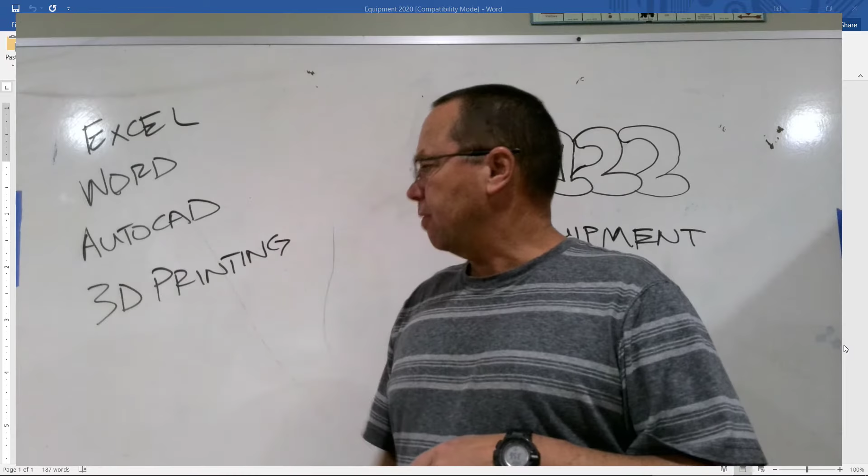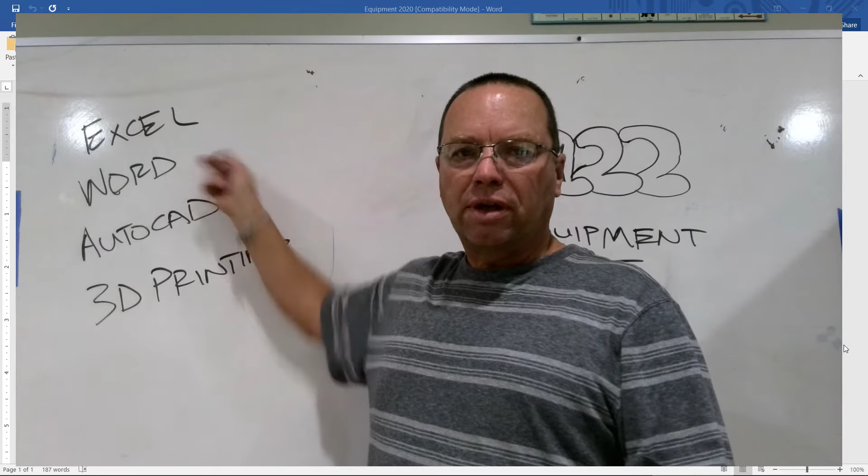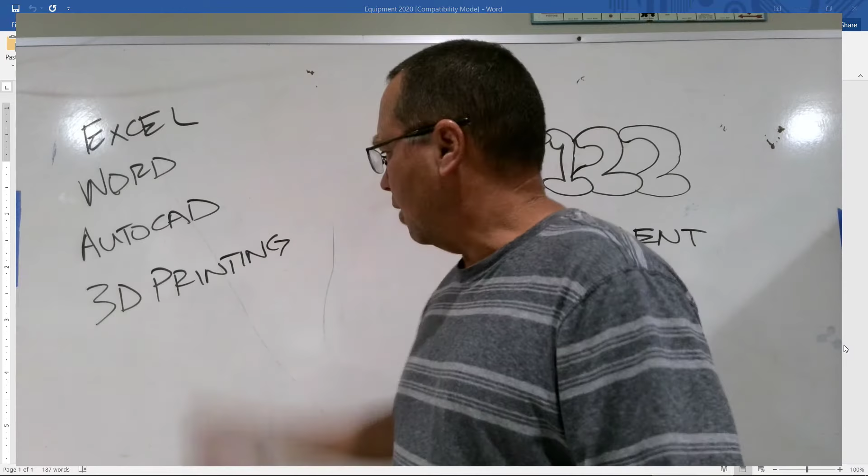I'm going to go through the list real quick, and I have a lot of it here to show you the physical stuff. In addition to the physical stuff, you're going to need access to Excel, Word, AutoCAD, and some 3D printing. Don't buy AutoCAD, I have a free license, we'll download it when we need it. And don't buy the Microsoft Suite either, the college has free versions, I think it's Office 365, so don't buy anything. But if you can start working on downloading it, that would be good. For 3D printing, we have a 3D printer, and we'll talk about that when we get there. But this is engineering problem solving, so we're going to use a lot of different things to solve problems. That's the fun part of the class.

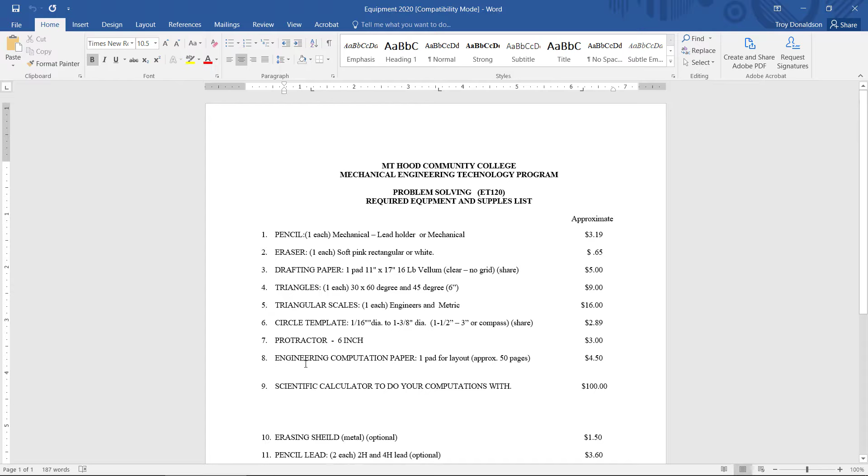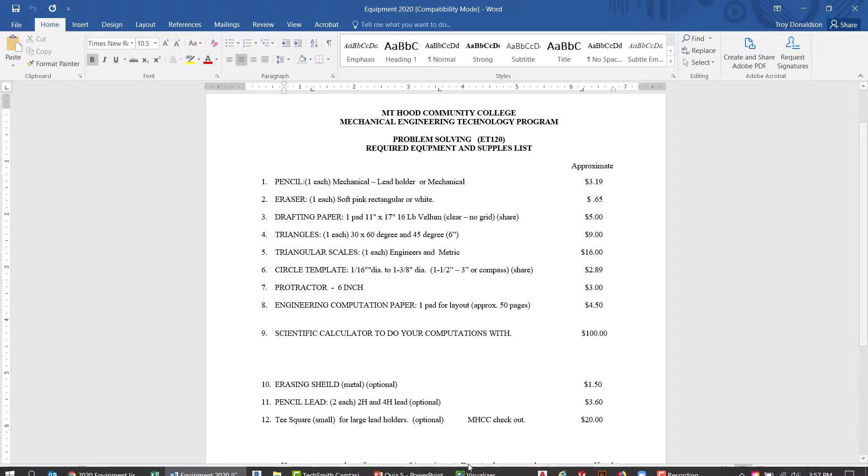All right, let me get to the equipment list. Here is the list, it's on Blackboard. You can look through it, but just words on a piece of paper doesn't always tell you what you need, so I want to go through it. I think I have everything in front of me that is on this list, hopefully, so we'll see. I'm going to take this camera and spin it around and make it look at the ground.

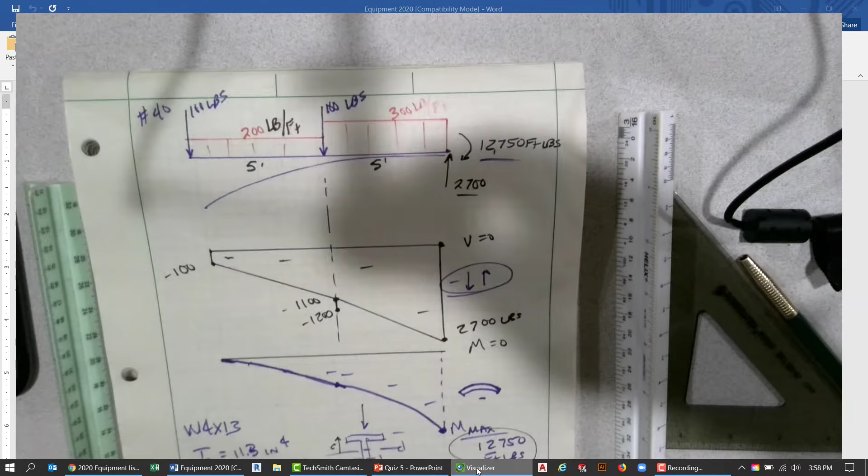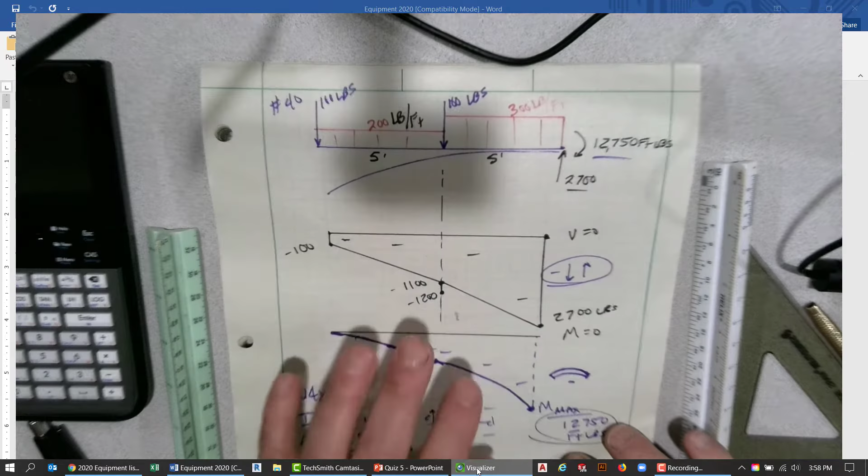Hopefully not upside down. We'll start with the engineering comp paper, that's the green paper you see here. You need to get some. Get a whole pad because you'll use it in a lot of classes. It's gridded, we work on the non-gridded side but the grid comes through, so you can actually draw some decent sketches and diagrams. Here you can see I've been working on some stuff on my engineering comp paper, and this is what you'll be doing too. So get the green paper and use it, try to stay within the borders, and work on the side that does not have the grid, not the side with the grid, like I've done here.

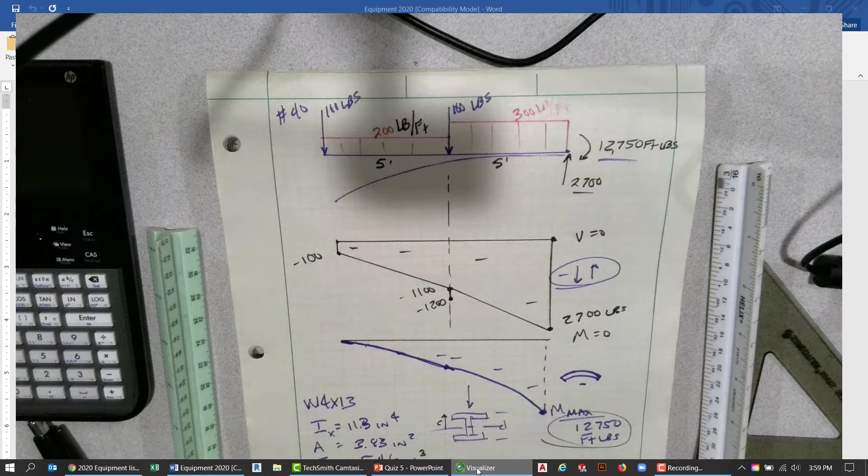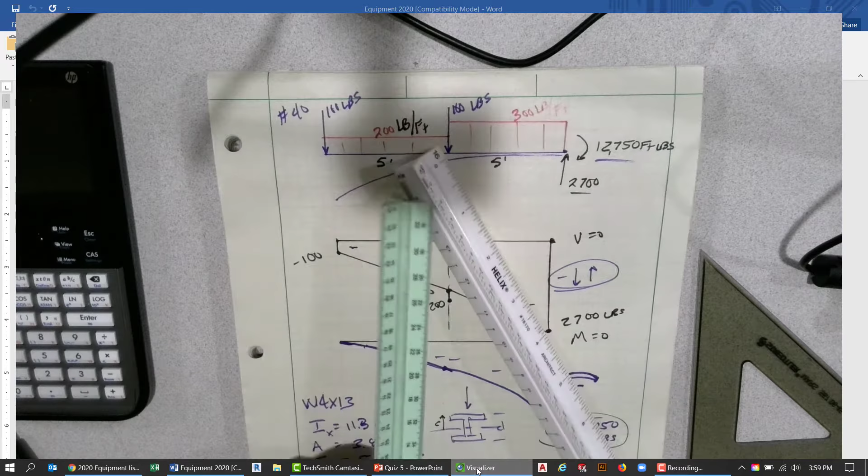Most of this you can get at Office Max and Office Depot. For scales, you're going to need two scales, called triangle scales because they look like triangles. On each side of the scale is a different measurement, we'll go over this when I get to it in class, so you'll get it much more in depth. But what you need is an architect's scale, I think you can see it says architect on there, yep.

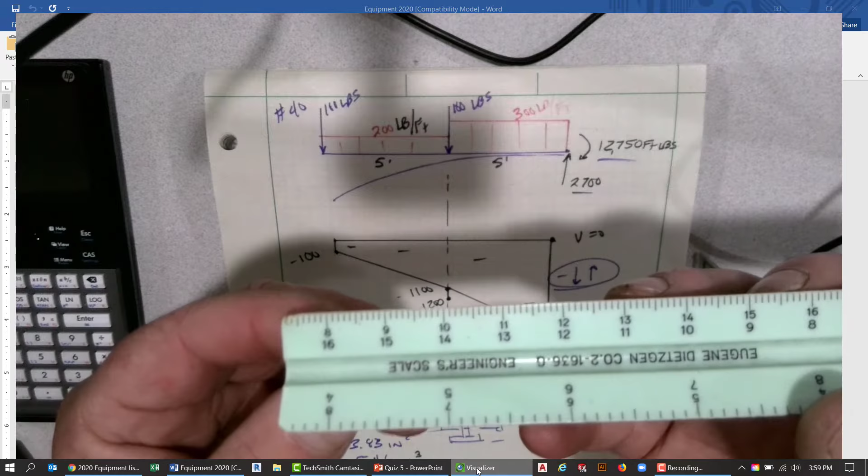So that's 1/8 of an inch, 1/16 of an inch, 1/4 of an inch, that kind of thing. And you need an engineer's scale, this one actually says engineer's scale. Stay away from the combos, those have both on them and that just gets confusing. This is a shorter one, I recommend the full 12-inch one, this one's much longer, 12 inches. The engineer's scale is broken into tenths, so tenths of an inch, 1/10, 2/10, 3/10.

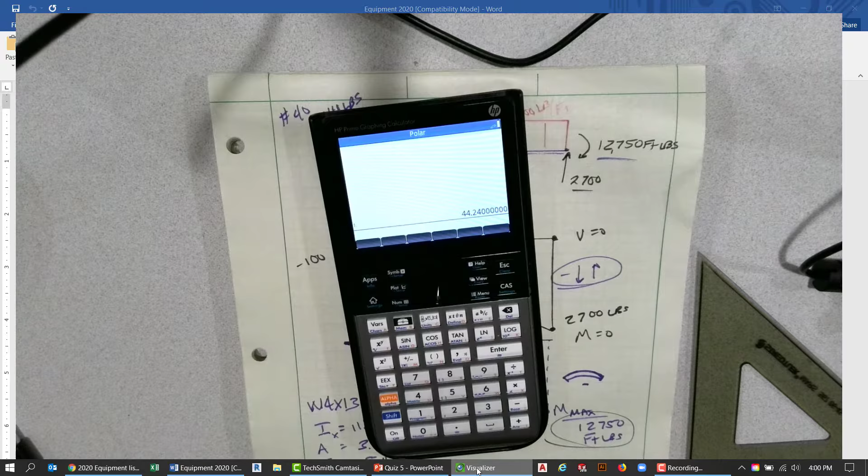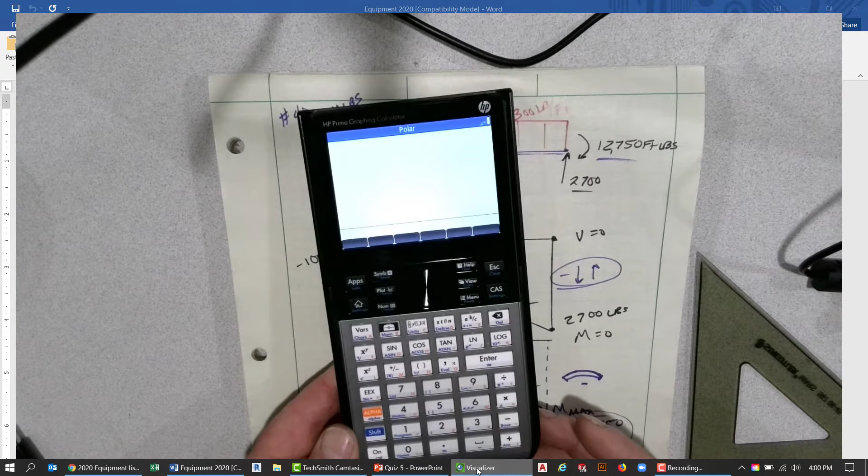That's different than 1/16, quarters, and eighths, so we need both scales. You could get a metric one also if you wanted to prepare for that, but we can also just do the metric calculations ourselves. Then you will need a calculator, a scientific calculator of any kind. Mine happens to be an HP, but you should get the kind you can use and operate, that's all I care about. It doesn't have to be an HP, it can be a TI, and if you have a math class it should be a TI because I think they're using that. So a calculator that you can operate, that's what you want, not something fancy that you don't know how to operate, okay? All right, so we need that.

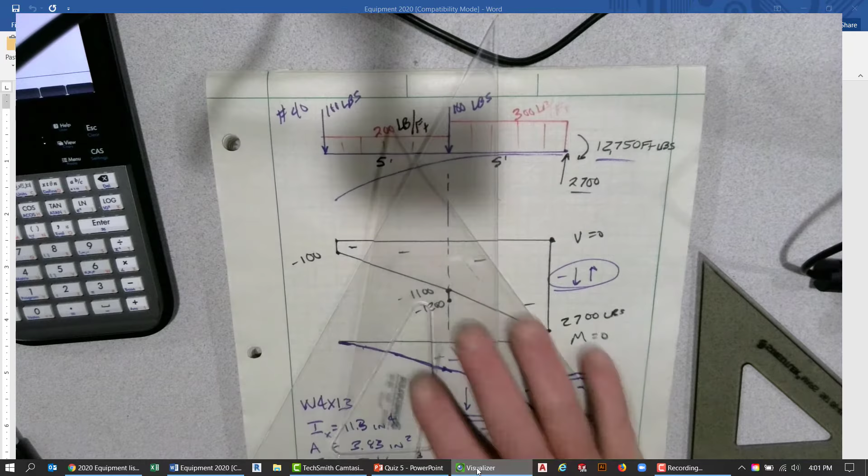You'll need triangles, so you need a 45, that's 45 and 45 and a 90, and you'll need a 30, 60, 90. These two triangles don't have to be this big, I think these are 6-inch, this is a 4-inch, a 4-inch is big enough. So this is a 45, 4-inch, I don't have a 30, 60, 90, but you will need two triangles.

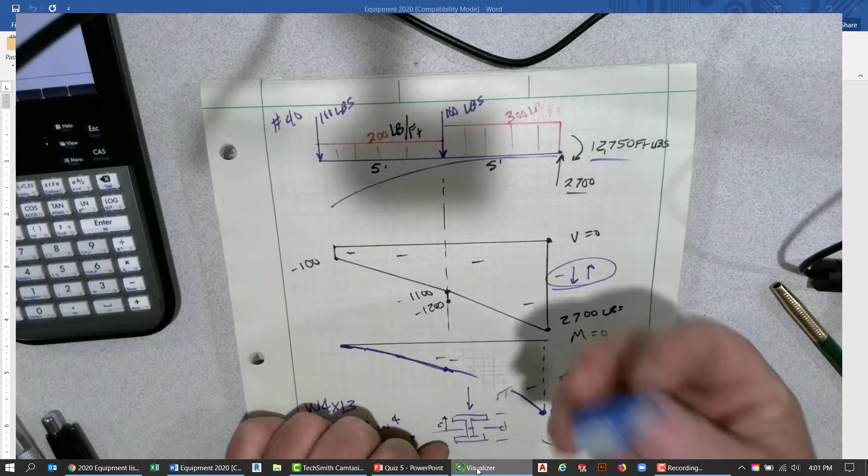You will need some tape. It doesn't need to be wide like this, but this is blue painter's tape. The advantage to blue painter's tape is you can stick it down, and then later you can peel it up. Oh, that did tear it, but a lot of times it doesn't tear.

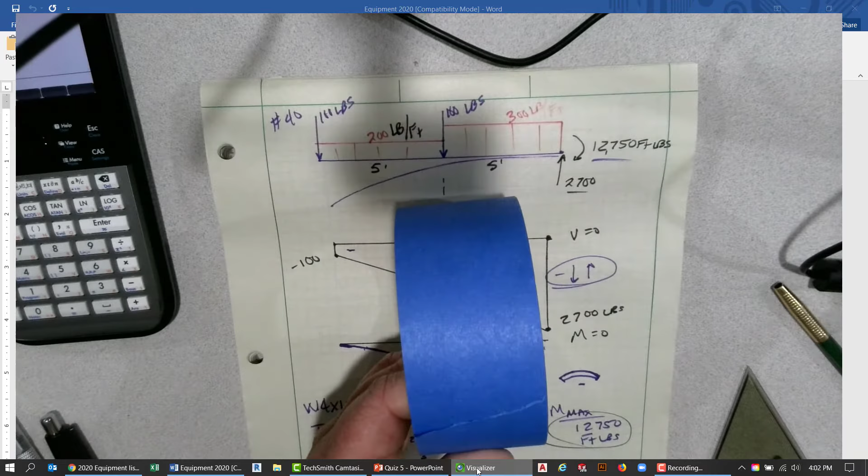I guess it would on this green paper. But we're also going to use bond paper, regular white bond paper, that I think I'm going to get to you folks—I'll probably mail it unless you already have it. But we need some kind of tape. Masking tape is more sticky; blue painter's tape is better. So again, not this thick—it can be like an inch or less, because we just use a little piece in the corner to tape it down.

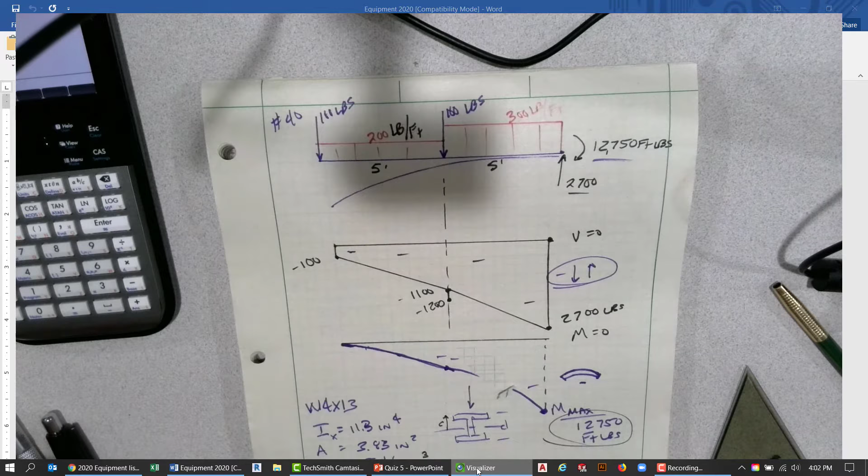All right, what else? Some kind of an eraser is good. Pencils—all different kinds of pencils out there, and I just brought a whole bunch. That's not a pencil, and that's not a pencil. We want to work in pencil. You'll see often I work in pen with color, and that's just so it's easier for you to see.

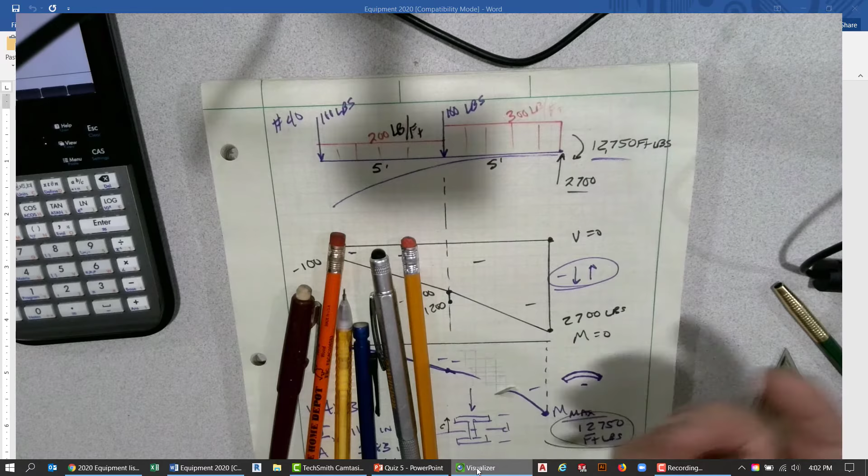But you're going to work in pencil, and what you want is a good comfortable pencil. This is a mechanical pencil—I like it because it's nice and big, and I can grab it and use it comfortably for lettering and also drawing, which we're going to do. You can use regular pencils if you'd like, you just got to keep them sharp.

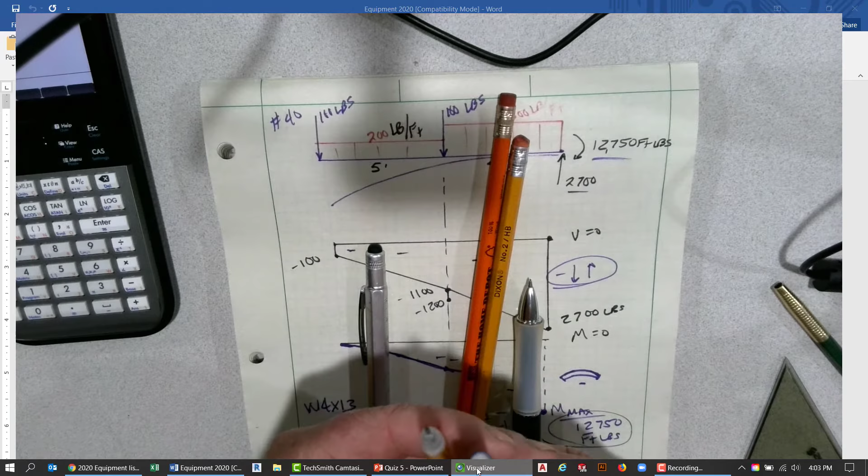I don't really care for these kind of mechanical pencils because the erasers are so small that they just disappear—you always find them like this, which is gone. So I prefer these kind of pencils. They twist, and the eraser gets longer, and it has a lot of eraser in it, so they're very handy. But that's just my personal preference.

All right, and again you just click it to get it out of there. So some mechanical pencils—this one I think I had on the job, so it's not cooperating with going back down. So that's, of course, wonderful. All right, we're going to take it apart and do some fixing there.

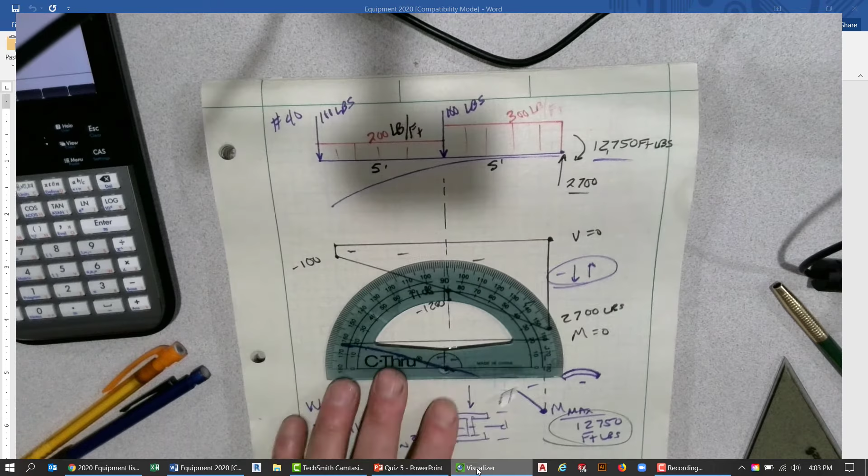Protractor—protractors measure angles. So when we're doing manual drawing, which we're starting with some manual drawing, we can use a protractor to lay it on a line and then measure an angle. So we will use protractors to find angles.

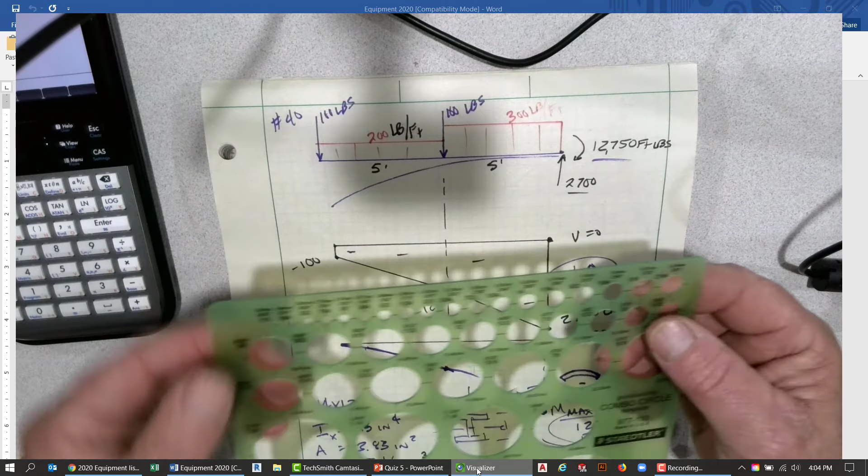Circle template would be good. This one's a little bigger than we need—this one is, what is it, a 1/16 of an inch to 1 7/8. So this is a little larger than we need, but it's nice to have a circle template when you want to draw a circle. That's very difficult to do by hand, right? But with a circle template, we can just go right around.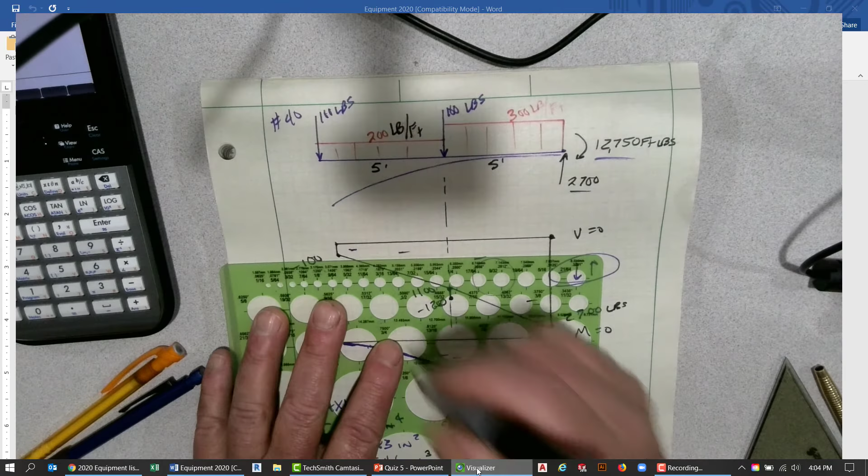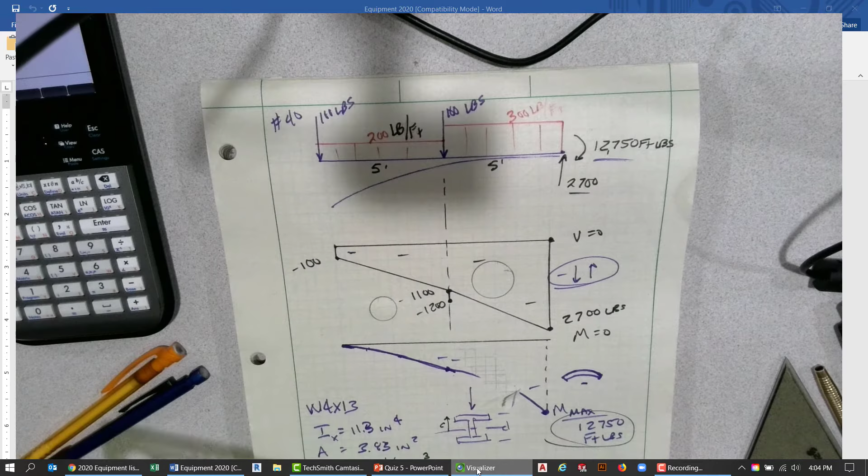All right, so a circle template—an 1/8 to 3/8 is probably fine. For larger arcs and circles we typically use a compass, but I'm not going to make you buy one of those. These are handy—it's optional.

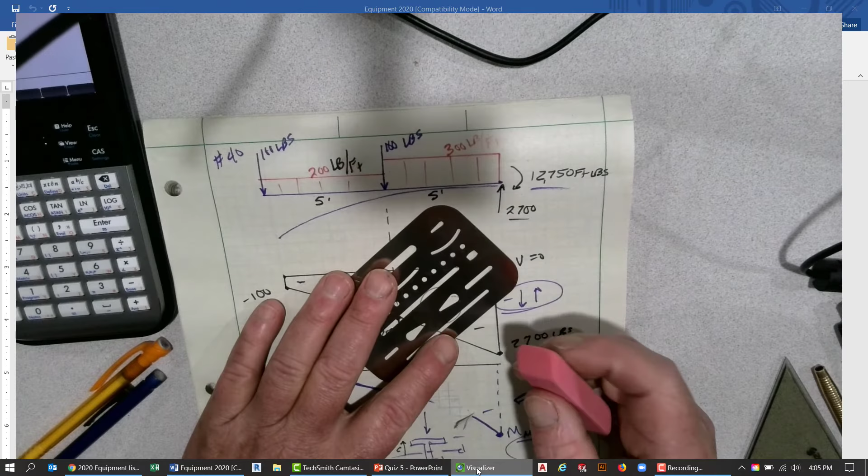It's an erasing shield, so you can lay it down and use it—here you can see I have a little mistake that I want to get rid of. So I can take a portion of the erasing shield, place it, and erase, kind of surgically removing some lead. Looks like I actually scarred the paper there. All right, so erasing shield, optional.

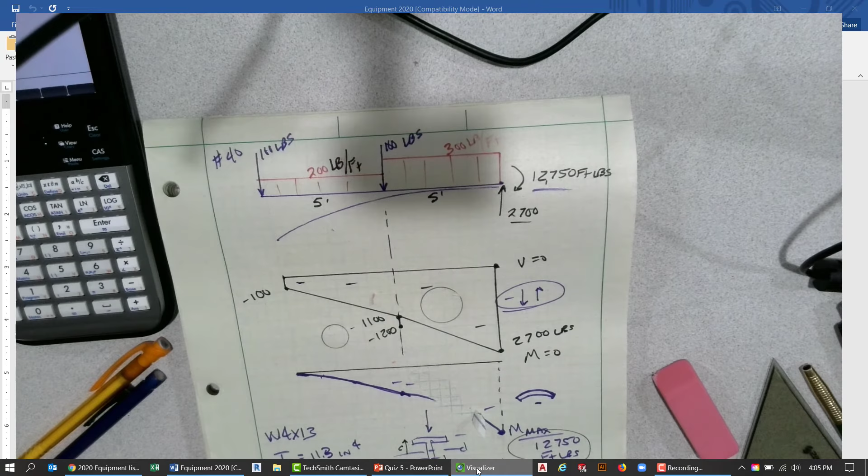Last thing is the T-square. So I'm going to go back to full screen here.

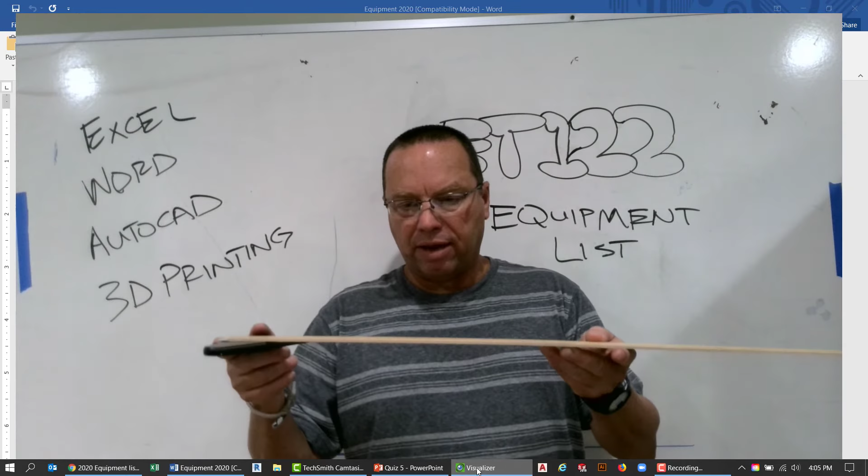So T-square, we have these at the college. This is a T-square, and it's going to lay on the table and make a straight line. So if you have a table with a straight edge, and most of us have tables with straight edges, this can lay down, and then this becomes a straight horizontal, and then we put a triangle on to make a vertical—that's called a T-square.

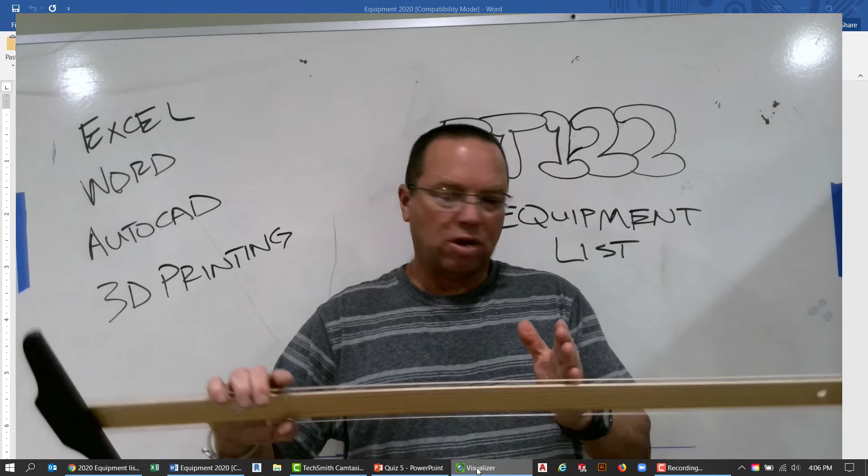These are pretty long, we don't need them this long, but I have these available at the college, so I'm going to chop one down for me. I could chop one down for you, or I could leave it full length. Then we're going to set up a time for you to come get it from the college—we'll have to do all kinds of safety precautions for that. Or you can send me your address and I will mail it to you. So we can do that either way.